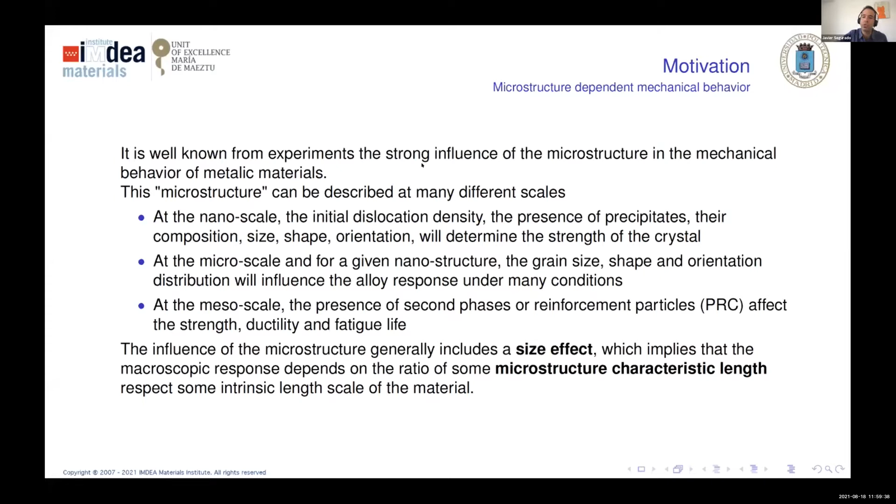In addition to the effect of the microstructure in terms of topology, there is a size effect. This means that even for the same topology of the microstructure, let's say grain size distribution or volume fraction of reinforcement particles, the actual size of the microstructure has an influence on the mechanical response. This is what we are interested in, and this is what I will present.

When does it happen? At the micro scale, this is something very common that we found, called the Hall-Petch effect. We have the same grain size distribution for the same heat treatment, same material—here an example is IN718—and just the variation of the average grain size produces different behaviors. In this case, the smaller the grain, the stronger the response.

At a larger length scale, when we have particles or inclusions embedded in a metal, for the same volume fraction of particles, we can have an effect from the actual size of the particle.

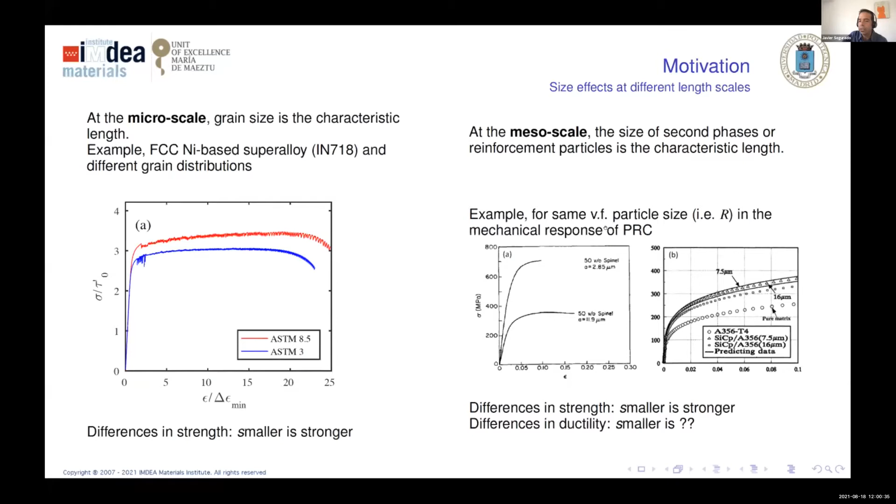So in this case, the smaller the reinforcement particle, the stronger the response. And this effect is also observed in ductility, which is also affected by the size of the particles.

We want to study that, and we want models that are able to link this microstructure, including size effect, with a macroscopic response, and computational homogenization is probably the best option. Computational homogenization aims at obtaining the macroscopic response and solving also the microfields, as shown by Dirk in the previous presentation, by solving the boundary value problem on an RVE of the microstructure.

In this case, the results depend on the microstructure and the behavior of the phases. That can be anything from elasticity to crystal plasticity or damage models.

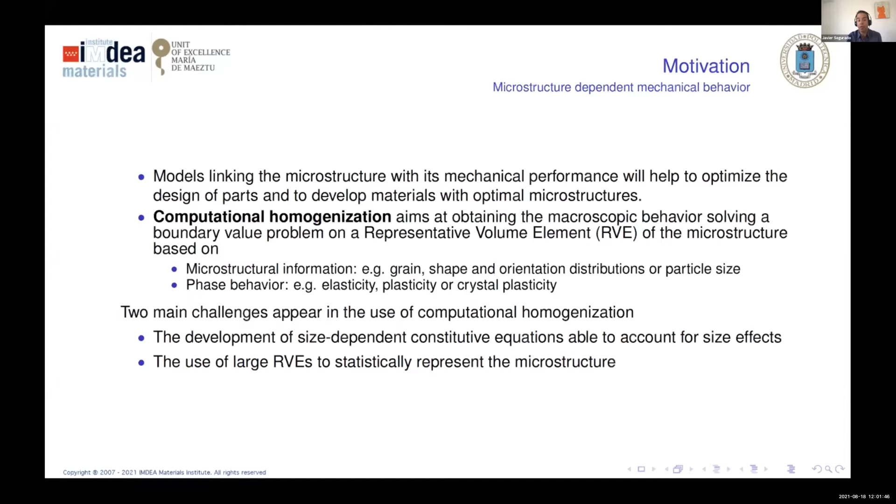In order to address these two aspects of size effects and computational homogenization, we have two main challenges. The first is that we have to develop or include size-dependent constitutive equations or approaches if we want to capture size effects, since standard crystal plasticity, standard plasticity, or some fracture approaches do not consider size-dependent behavior. The second is that if we want to take into account the effect of the microstructure accurately, we need to use large RVEs, very complex, that represent the microstructure accurately.

These challenges have of course been studied in the literature. For the first one, there are a lot of models that introduce size dependency. In the microscale, we have strain gradients in crystal plasticity, micromorphic models, and similar models. In the mesoscale, we have other similar approaches, but normally these models are very complex and are applied under simplistic approaches, so it's difficult to find these complex models applied in complex three-dimensional simulations.

Regarding the second challenge, using large RVEs, the problem is very much related. We have alternative approaches to FEM, like FFT, which is the basis of DAMASK, for example. But many times these models use standard models, although linked with other chemo- or temperature-dependent constitutive problems, the mechanical equations are very often local, so standard.

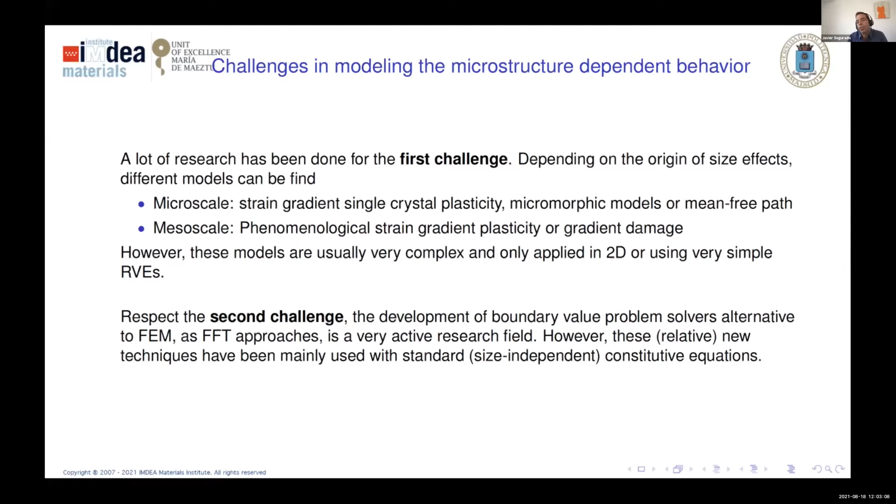The threat is just to link the two challenges, and this is precisely the objective of this review work. We want to develop microstructure-dependent models based on FFT homogenization that allow us to study and predict microstructure size effect. I want to emphasize what microstructure size effect means.

Gradient models appear when the community wanted to see why having a specimen of different size leads to a different response. Here the size effect is the relation between the specimen length, or some characteristic length of the specimen, with respect to some intrinsic length of the material.

In this case, we're speaking of another type of size effect: material size effect. Here the size effect comes from the relation between some characteristic length of the microstructure, not of the specimen - for example grain size, particle size, distance between particles, things like that - with some intrinsic length scale of the material.

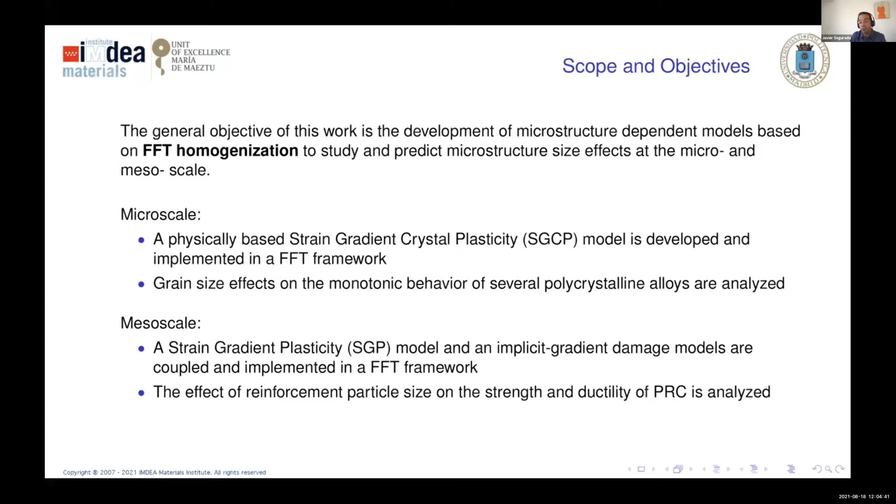In this case, we will present two works. One is on the microscale, where through a strain gradient crystal plasticity model we will study the grain size effect, and another is on the mesoscale, where combining strain gradient plasticity with an implicit gradient damage approach, we will study the effect of particle size in particle reinforced composites. Which is the common homogenization framework?

The common homogenization framework is FFT homogenization, and FFT homogenization is not new at all - it's almost 30 years old. It was introduced by the pioneering work of Moulinec and Suquet. What is the key idea?

I'm not going into many details, but the thing is, we have discrete fields, and we can operate with these fields in Fourier space. So we transform into Fourier space with a discrete Fourier transform, and then we can perform some operations very efficiently. The first one is that a field can be derived just as a multiplication - the Fourier transform of the derivative of a function is nothing but the product of the frequency by the transform of this function.

So by a product, we have the operation of derivative. And it's clear that using this and combining it in several dimensions, we can obtain expressions for different differential operators like divergence, gradient, curl, and so on.

And the second thing is the convolution. If we use Green's function, the solution of a problem can be obtained as a convolution of the Green's function with some source term, and this is the basis of the Fourier method. The problem is that in real space this is extremely expensive, an order n square operation, but this convolution can be performed very cheaply in Fourier space, because convolution there is just a product.

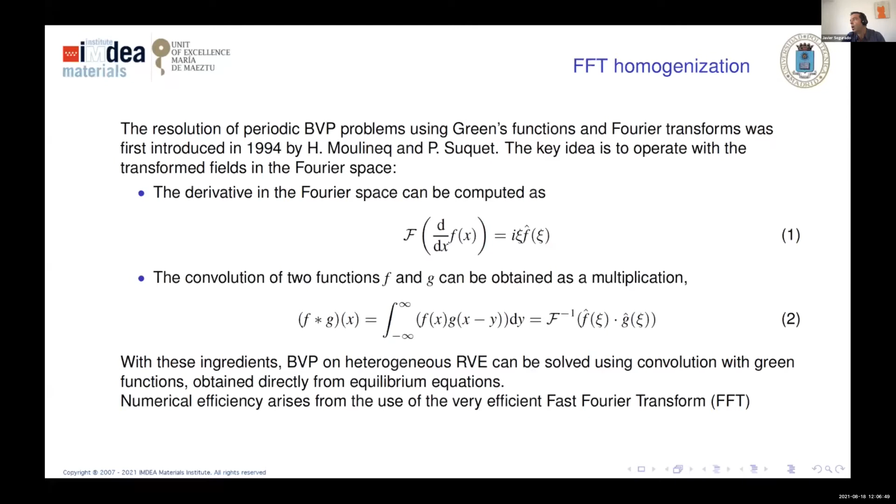So with these two ingredients, boundary value problems on heterogeneous RVE, can be solved very easily. The key is that this transformation from real to Fourier space can be done very efficiently. Operations in Fourier space are fast, and moving fields from real to Fourier space is also very fast because we make use of the FFT algorithm, which allows us to do the transformation in order n log n.

So what are the benefits? There are three main benefits of FFT solvers for computational homogenization, and I emphasize computational homogenization, not general boundary value problems, because things become much more difficult in that case. The first advantage of FFT versus FEM is periodicity, which is ideal for computational homogenization. This is natural in FFT, while in FEM it introduces additional complexity and computational cost.

The second thing is the computational cost itself. The most expensive operation in FFT is the Fourier transform, which is order n log n. In FEM, depending on whether we have a direct or iterative solver, and depending on the bandwidth, we are normally at order n square or n cube computational cost.

So it means that in the same time we can reach much larger RVEs or do more statistics. The third and very important thing, also shown in many examples by Dirk, is that we don't need to mesh. We can use directly information from tomography or from EBSDs and do a direct simulation.

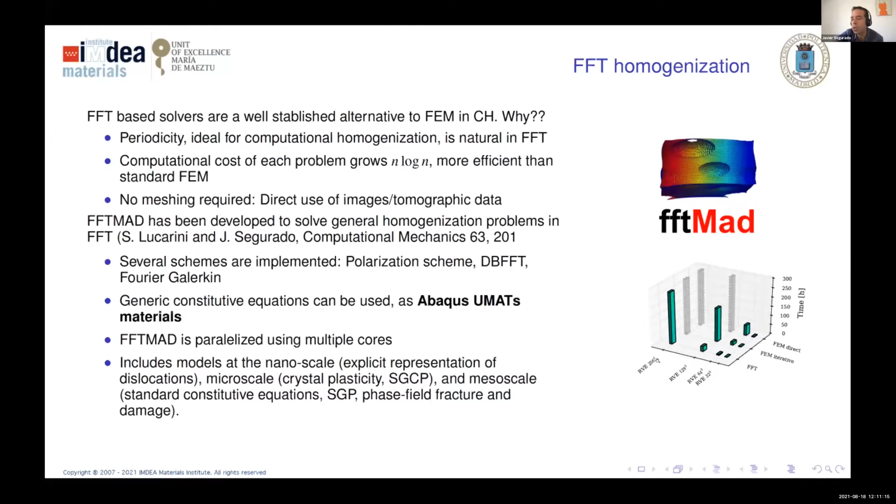But when we move to 16 million voxels, that is 256 cubed, then in FEM we cannot even allocate a problem for the same computer.

So what is the computational homogenization problem? The statement is we have an RVE, a real RVE that we have solved within FFT with thousands, something like 20,000 grains. And we want to solve the equilibrium, divergence of Piola-Kirchhoff stress equal to zero. We want to solve the equilibrated stress under some boundary condition.

Which are these boundary conditions? We impose the macroscopic deformation gradient history, and we impose combined or mixed boundary conditions. So in some directions we can only know, we can also know the average stress. In this case, what we want to solve is the mechanical problem of the equilibrium under some macroscopic stress strain, having the fields being periodic.

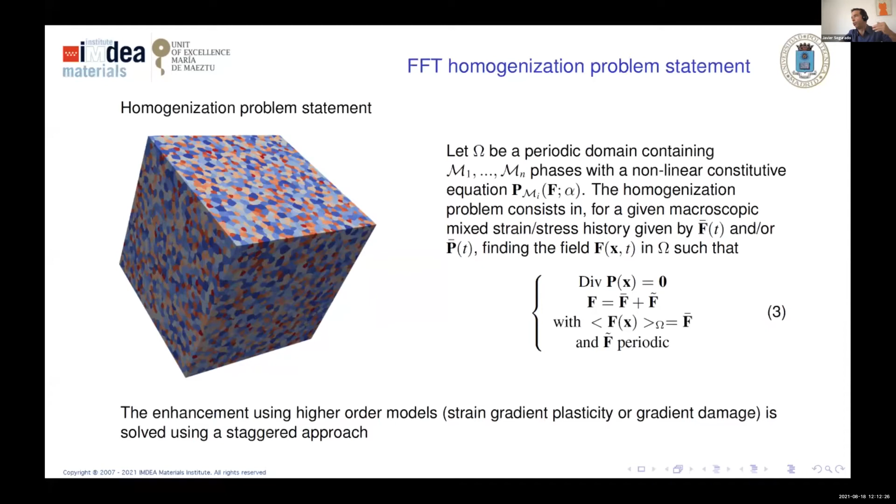And how we couple that with higher order models, we do it using a staggered approach. We solve this problem, and then we solve for the enhanced higher order problem for the coupled equations, and we do it until we get convergence.

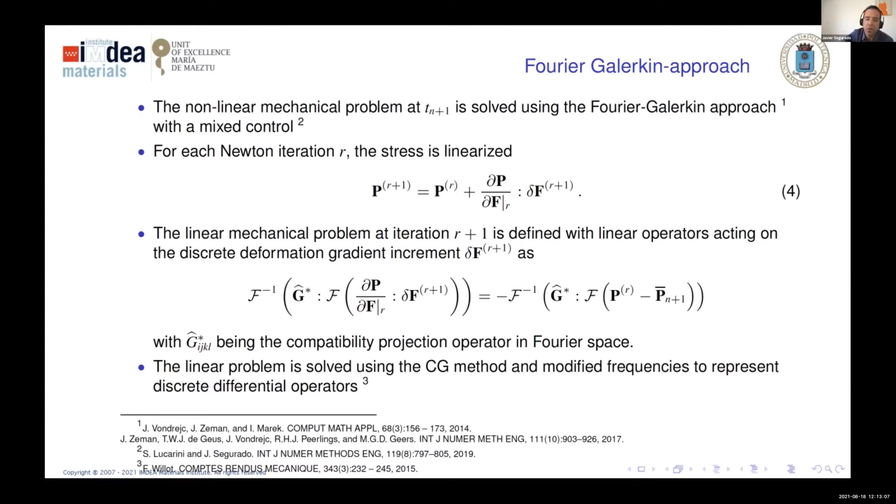In terms of the Fourier solver, we are now focusing many times on the Fourier-Galerkin approach developed by Jan Zeman, Geers, and co-workers and some others, that we have combined with our own method to impose mixed boundary conditions. So we do not have to iterate for obtaining uniaxial stress, but we can directly impose free stress or some given stress in some directions within the problem. I'm going to pass over this—it's not in the scope of the talk, but this is what we are using.

Let's go to the two problems that I want to show. The first one, as I told you, is on the microscale, and we're interested in using this technique to obtain grain size effects in polycrystals.

The grain size effect is a very old and well-known problem, and there is a well-known relation written here, the Hall-Petch relation, that tells us that the flow and the yield is related with the inverse of the square root of the grain diameter. This law scales well experimentally, not exactly, because this exponent is not exactly 0.5 and some other things, but it works more or less properly for many, many materials.

But we have an interest, first of all, in understanding which is the origin of Hall-Petch, knowing if it's universal or if it depends on other factors or microstructure items and so on. In this case, just combining strain gradient crystal plasticity with computational homogenization through FFT can help us to understand and answer some of these questions.

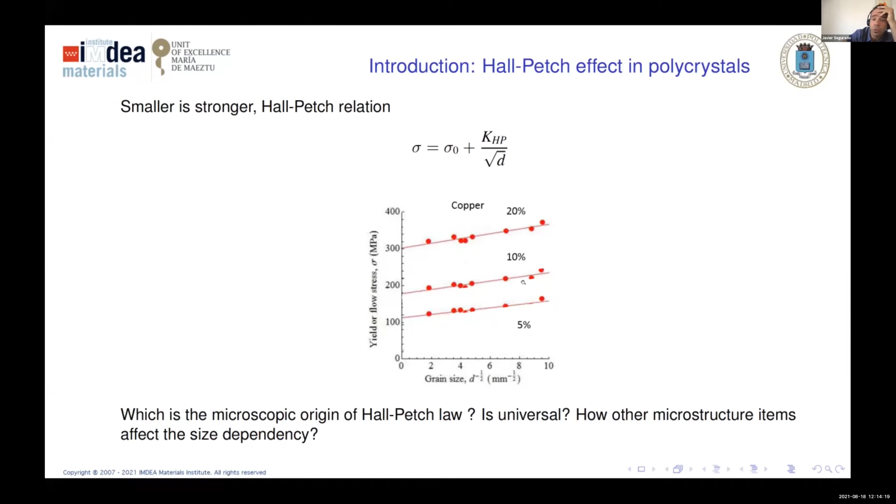First, which is the physical origin of grain size effect? It depends very much on the particular alloy, but one of the most common mechanisms that gives rise to size effects is the accumulation of geometrically necessary dislocations around grain boundaries. This geometrically necessary dislocation appears due to the plastic incompatibility and the accumulation of dislocation pileups near grain boundaries. Let's explain this: when I have a grain that wants to deform in one direction, and another grain in another direction, because crystal plasticity is very anisotropic...

what I have are some strains that are not homogeneous within the grain. These strains have a variation from the grain boundary to the interior. In order to accommodate this gradient of the plastic strain, we need to introduce into the material some dislocations of the same sign that somehow cover this incompatibility in the deformation. These are what we call GNDs, and they are responsible for that.

Of course, for the same change in plastic strain, the smaller the grain, the larger the gradient, and then the larger the amount of GNDs that we have to introduce. This is one of the sources of size effect, the one that we are considering here. But nevertheless, this size effect depends on many other factors: the anisotropy of the crystal, the particular texture, the initial dislocation density. So we cannot use any universal equation—Hall-Petch works well or poorly because we're fitting something very simple into a very complex problem.

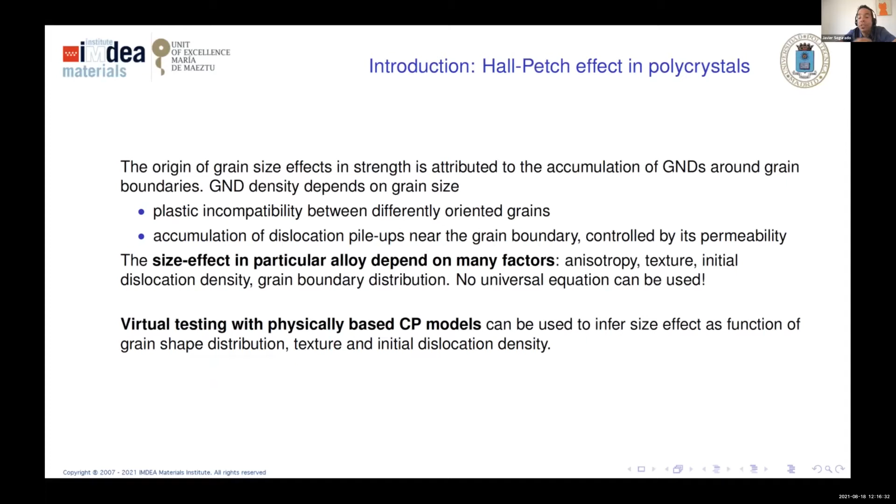Let's put the microstructure, as much information as we want, and let's make a virtual test, okay, just changing the average grain size and see which size effect we get. For this we need a crystal plasticity model.

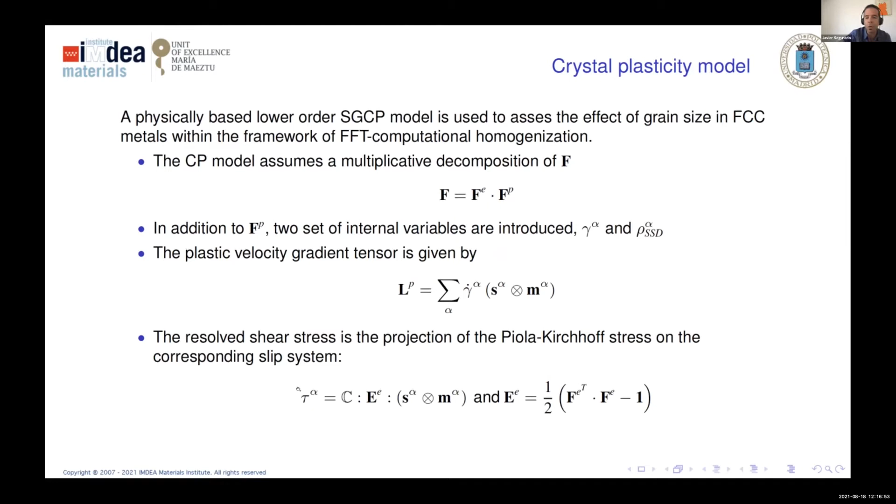I will go fast. The model has the standard kinematics of multiplicative decomposition. Plastic velocity gradient is the Schmid factor multiplied by some shear rates, and the driving force is the resolved shear stress tau, that is nothing but the projection of the stress through the Schmid tensor.

So the shear rate follows a phenomenological power law, where the driving force is the resolved shear stress, and we use a simple, because we want to limit very much the number of parameters, a very simple physically based model. The model is based on Kocks-Mecking.

So we have an internal variable that is the statistically stored dislocation density, which we put as rho, and the evolution of the dislocation density is driven by the Kocks-Mecking equation, which has a creation or accumulation term and an annihilation term. We have some parameters: the availability of the material to accumulate dislocations, modeled by K, and another that is the distance from annihilation.

This is the evolution of this internal variable, and then the critical resolved shear stress is directly given by the Taylor model, where we say that the critical resolved shear stress is nothing but the shear modulus, the Burgers vector, and the sum of the dislocation densities pre-multiplied by some factors that account for the different junctions, so the different type of latent hardening of some systems to the other.

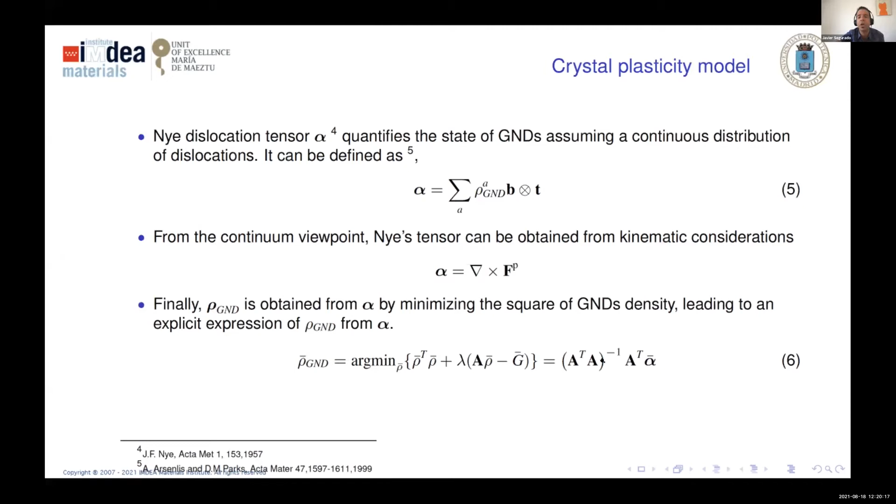So we do that, and how do we solve this? Because we are in FFT, we can very easily do the differentiation, the curl operation, in FFT, because we know the internal variables exactly at the same points where we know the other fields. So we just do the curl, and we take care that we don't have noise, because we have an Fp that has some strong discontinuities from grain to grain.

I'm not going into the details, but we apply that and show how we can obtain size effects. So we're going to use four alloys: copper, aluminum, nickel, and silver, and we're going to use this type of RVEs with 100, 200 grains and different discretizations. The model is not cheap, so we normally use 100, that is enough. We're going to create a synthetic RVE with an average grain size and standard deviation following a log-normal distribution, and we're going to use for this example just a random texture.

So now the model has some input parameters that are obtained from dislocation dynamics in the case of some dislocation interactions, or from experimental studies, but we have not fit any parameter. That's precisely the reason why we want to minimize the number of parameters of the model.

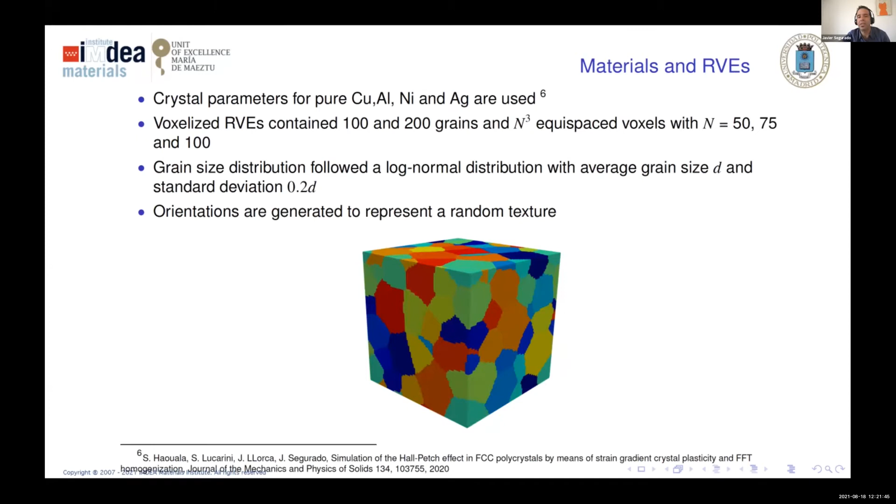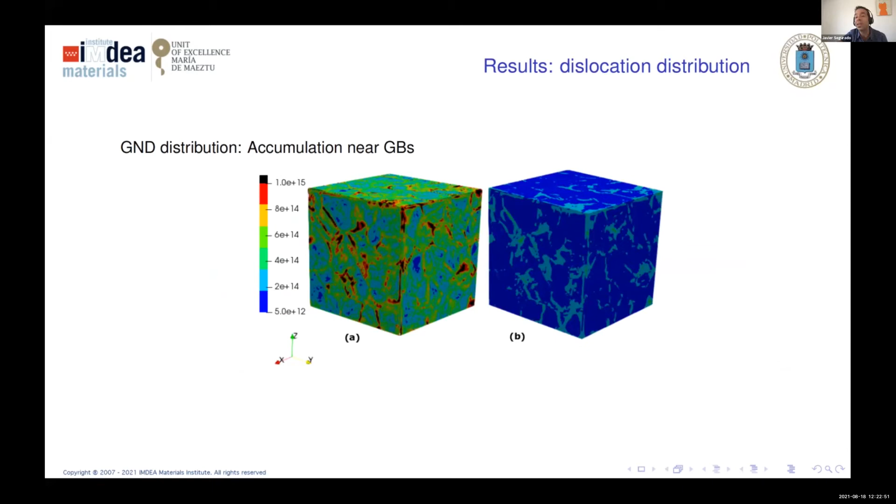Where do the GNDs go? They go to the grain boundaries, that's where we have the largest gradients, that's where they accumulate. And since they accumulate there, the dislocation density cannot grow more, but we have stronger points near grain boundaries.

This is due to the way we incorporate the gradients through the GNDs in the Taylor model. So we can say that this is something we want to improve.

But I want to emphasize, and that's why we're quite happy with this model, it's published in the JMPS in 2020, that the interesting thing is with a quite simplistic model we're able to reproduce experiments without fitting parameters for many FCC alloys with quite good accuracy, considering more or less the physics of the problem.

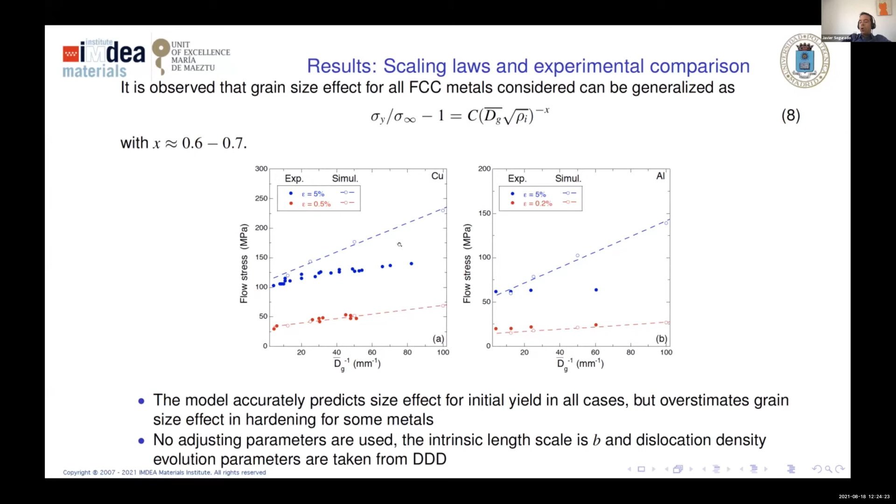Let's go then to the next problem, that is size effect at the mesoscale. And in this case we're going to focus on particle reinforced composites. If we don't have the effect of the grains and we consider that the material is like a monolithic material, isotropic or anisotropic, but what we observe in the microstructure are particles, we have a particle size effect.

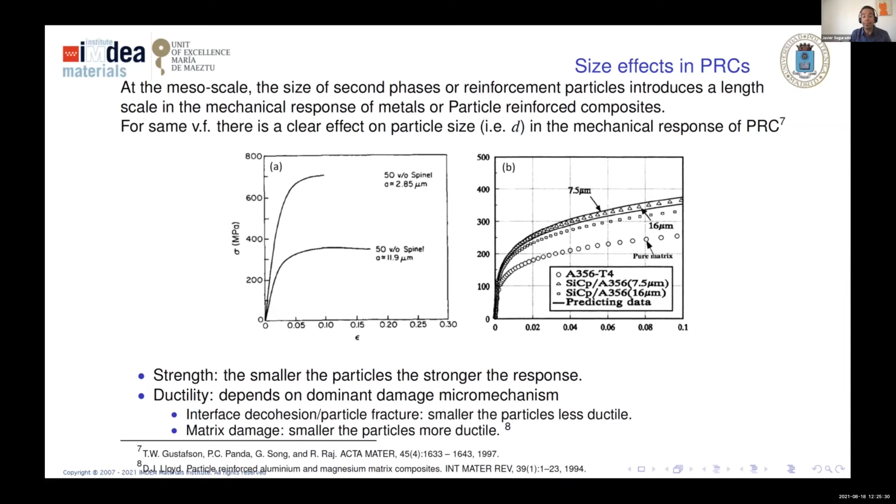But we also have an effect on ductility, and this effect is not so clear, but it depends on the dominant damage micromechanism. So if we have interface decohesion, the smaller particles produce a more brittle behavior, but if everything is ruled by matrix damage, that's what we're going to study, and this might happen at high temperature, then the smaller the particles, the more ductile the material.

And what's the physics behind this, and what models do we have if we want to account for this? In the case of ductility, we have to think in terms of the intrinsic length scale. And this intrinsic length scale, that in the case of the smaller length scale was the Burger's vector, in this case is the size of the damage band.

So in ductile failure we observe a band of damage, so we don't have a localized crack, we have like a damage band that introduces an intrinsic characteristic length. And then the ratio between the characteristic band of damage and the size of the particles is the one that drives the size effect in terms of fracture.

And in the case of strength, let's say the reason is more or less the same as before. There is some characteristic intrinsic length scale that is equivalent to the Burger's vector, but it depends on the model you take, it's the intrinsic characteristic length of the plasticity. And then the size of the particle relative to the characteristic length introduces the size effect. So in this second case, when the particle size is much larger than the characteristic length for the plasticity, these effects are negligible. So what is the objective?

We want to develop an FFT framework to study particle size effect in particle reinforced composite, including ductility and strength. This work has been published in Computer Methods and Applied Mechanics in terms of the model, and the one on size effect is now under review.

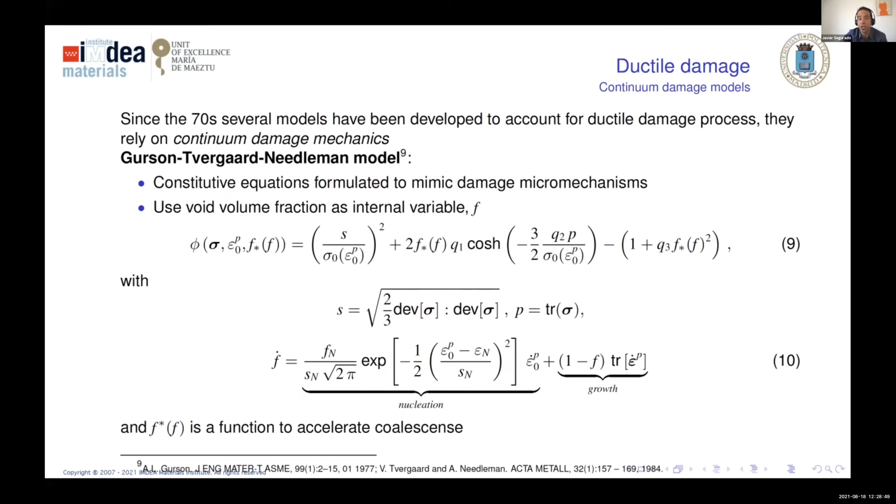The problem with these continuum damage mechanics models, well known for many years, is that when we implement and try to solve them, at the point where we reach the maximum, we reach a condition of instability.

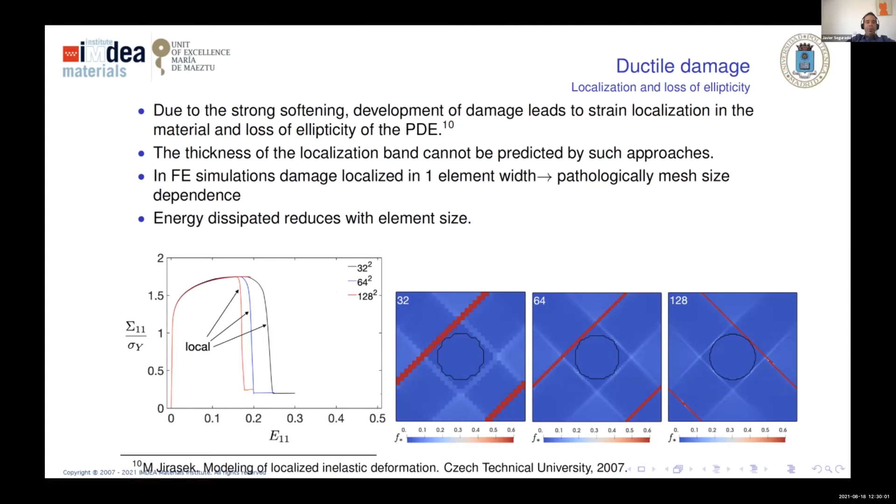How can we solve it? There are different approaches, but we focus on using non-local models. The idea is that some internal variable, which can be the volume fraction of porosity or another variable, does not depend on its own value alone, so it's not local, but depends on surrounding points.

We can say that this internal variable, imagine the porosity, the non-local version is just the integral of some weighting function times the value of the local counterpart in a region controlled by a characteristic length. This integral non-local model is very hard to integrate in a standard continuum mechanics framework. So what we can do is a Taylor expansion of the expression, playing around with the equation, converting it into a gradient approach.

In this case, the unknown is the non-local internal variable, obtained by solving a partial differential equation, the Helmholtz equation. It's nothing but the same equation we solve in phase field, with a characteristic length like in phase field, and some boundary conditions that are free Neumann boundary conditions.

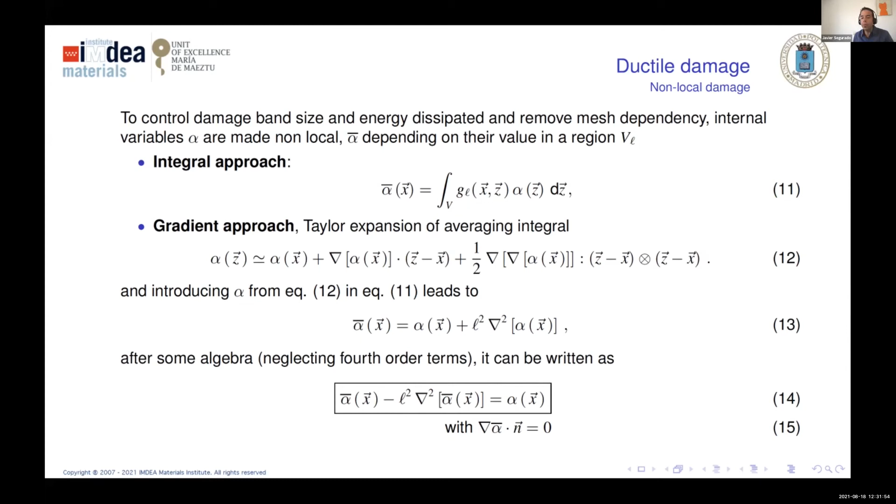The difference here is that the source term is the local value of the internal variable. The other difference is that the characteristic length here is a physical parameter, not a numerical parameter. This physical parameter is related to the size of the band in which we localize damage. So unlike phase field fracture, where in linear elastic fracture mechanics the correct solution tends L to 0, here L is a parameter we have to consider because it's part of the physics.

So in this case we have to solve a coupled system of PDEs: the equilibrium equation, in which sigma depends non-linearly on the non-local variable, and the Helmholtz equation that delocalizes the value of the internal variable. Which internal variables do we delocalize in Gurson? Instead of delocalizing the volume fraction of porosity, we delocalize the volumetric plastic strain and the equivalent plastic strain.

So in this case, the evolution of porosity depends on the non-local counterparts of these internal variables. So we have to solve a Helmholtz equation for each of them.

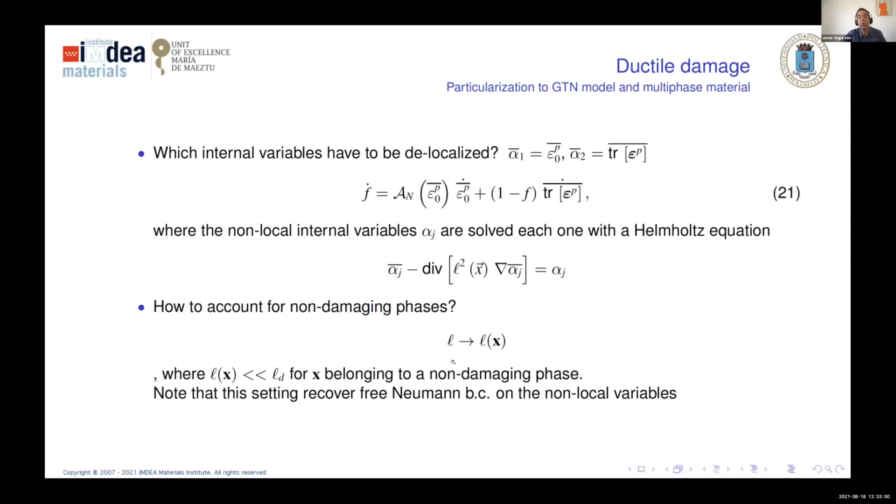The second question is how we account for materials with non-damaging phases. In this case, we can introduce a characteristic length that depends on the position, making the characteristic length for points belonging to non-damaging phases tend to zero. If we do that, we have proof that we recover the free Neumann boundary condition, as we will see in the experiment.

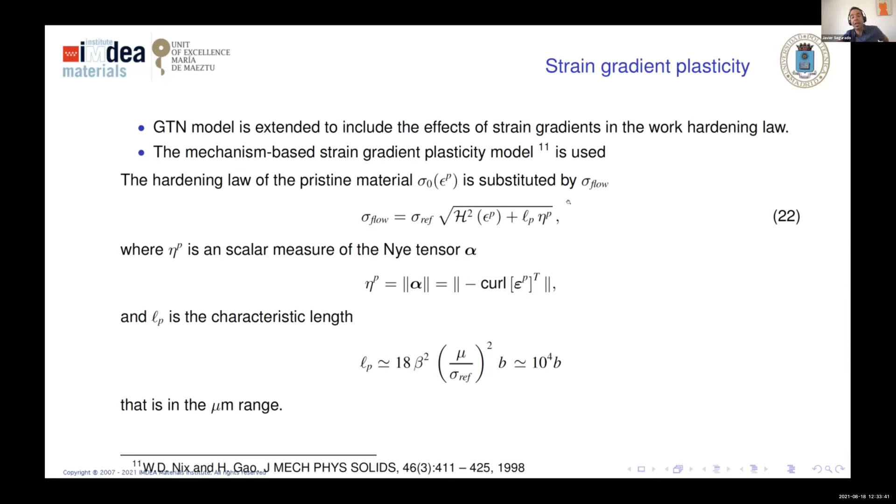So we have the first part, the gradient model and the damage model, and the other is strain gradient plasticity. What we're using is the mechanism-based strain gradient plasticity model, exactly the same as the crystal plasticity counterpart, based on the Nye tensor through the curl of epsilon p, introducing an expression that emulates Taylor's. Let's say that is the upscaling of the previous constitutive model.

So we're now going to see how it works on particle reinforced composites, first in 2D. Let's first check if we are able to solve the pathological localization problem.

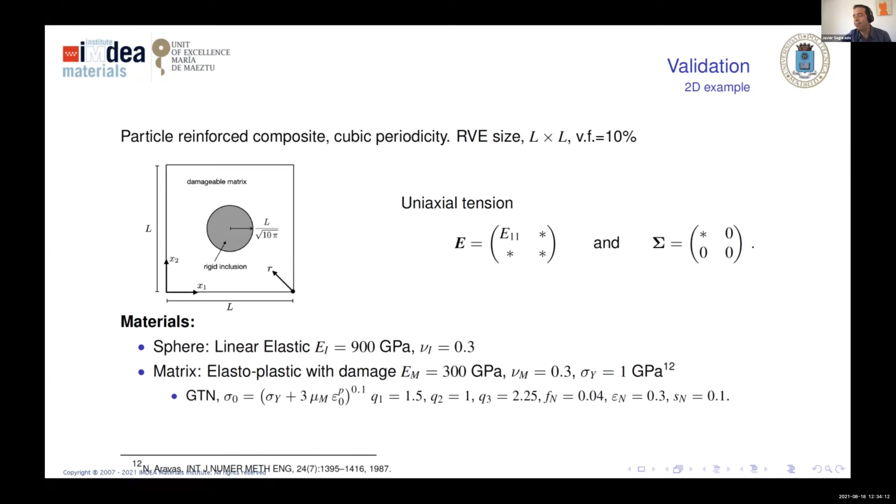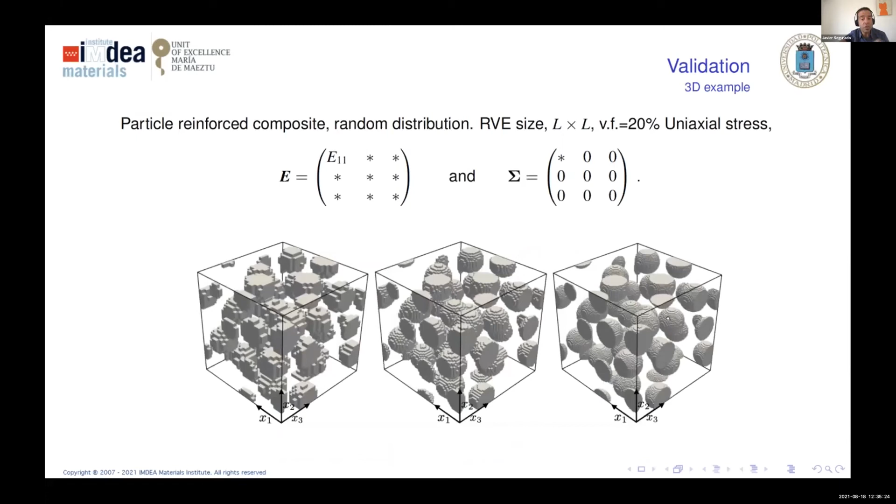Okay, let's go to 3D. Three different sizes. Now the RVE is a particle reinforced composite with spherical particles randomly located, 20% volume fraction, and the same setup. The original model, local, has a size dependency, while the non-local model has the same behavior for all the different discretizations.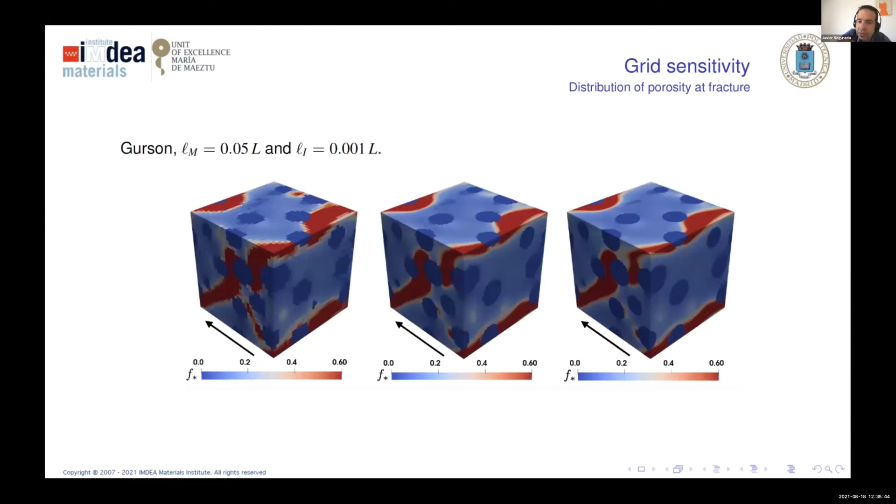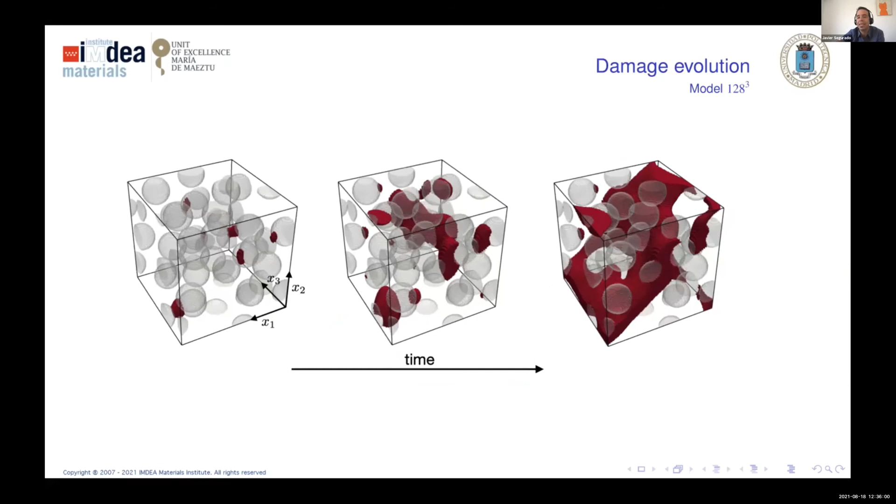And we are able to model which is the band, how it locates, and we are able also to show how the band evolves. So we have developed a very nice model that allows us to do 3D simulation of fracture or damage in this case, considering complex microstructure.

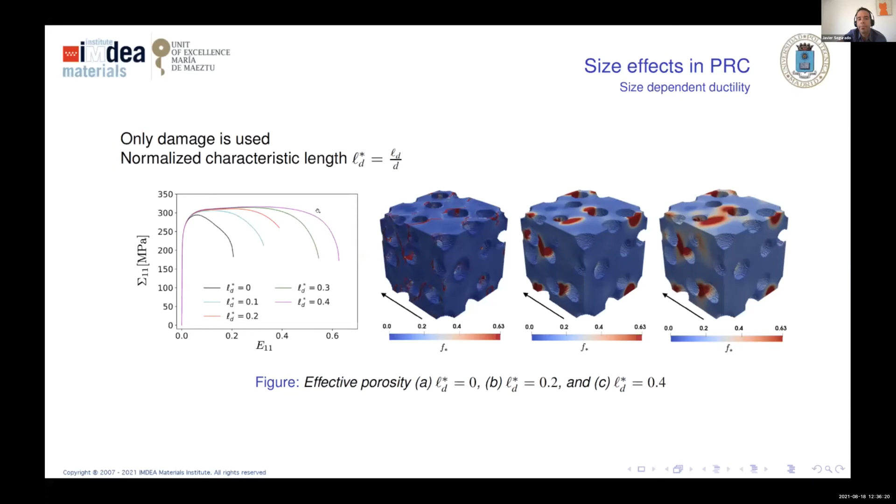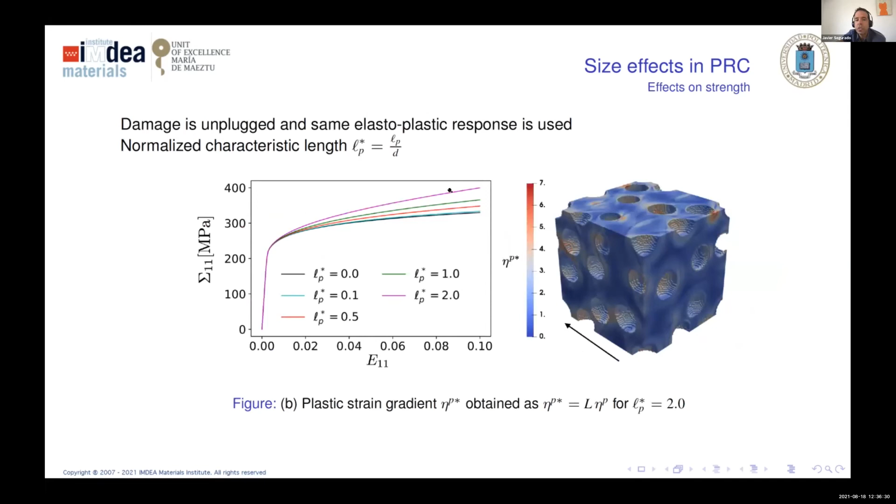I have no time almost to finish, just showing that if we combine strain gradient plasticity with damage, we can observe the size effect. The first one in damage is that the smaller the particle, the more ductile - we see that the curves move to the right. And in the case of the strength, the smaller is the stronger. If we combine both, we can see which are the optimal particle sizes for particle reinforced composites.

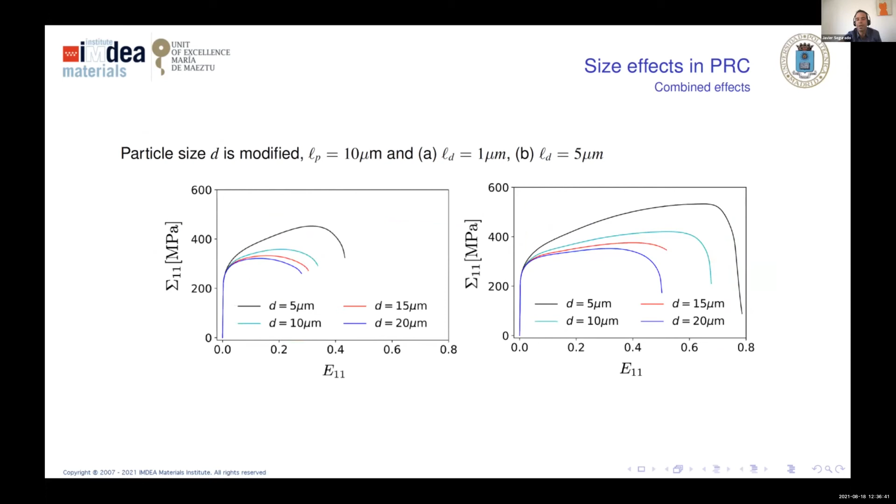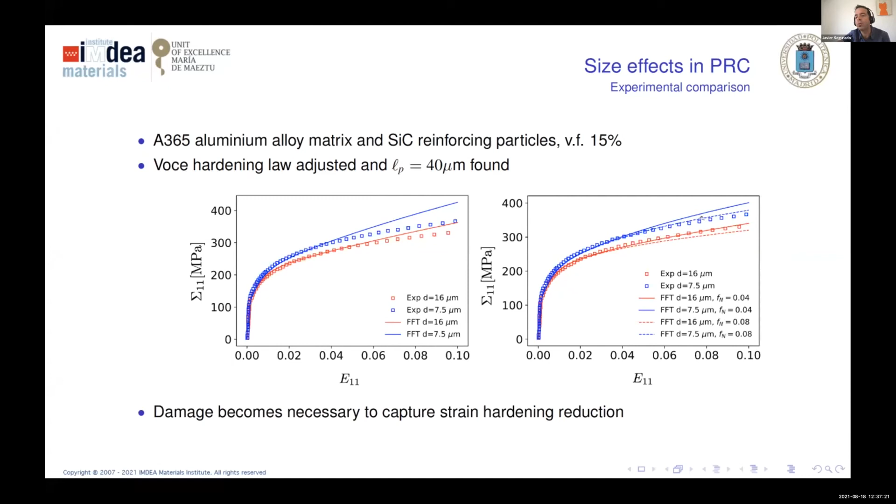So how this fits with experiments - in this case we have a quite phenomenological model, so we have to fit parameters. What we observe is that if we fit just plasticity without damage, we are not able to predict the response for large strains, but we predict well the particle size effect. And with this model fit up to here, if we just include the damaging part, we are then able to measure the first part where damage is not playing any role, where we have particle size effect, and the second part where the size effect in particle and damage play a fundamental role.

Okay, so, well, that's what we have done. Let's say that the main conclusion is that FFT homogenization is a very interesting tool to be combined with any type of non-local approaches through staggered models. I have not shown which are the techniques behind, but it's a good way to predict the effect of microstructure in the mechanical response, including size effects, both in monotonic response and beyond.

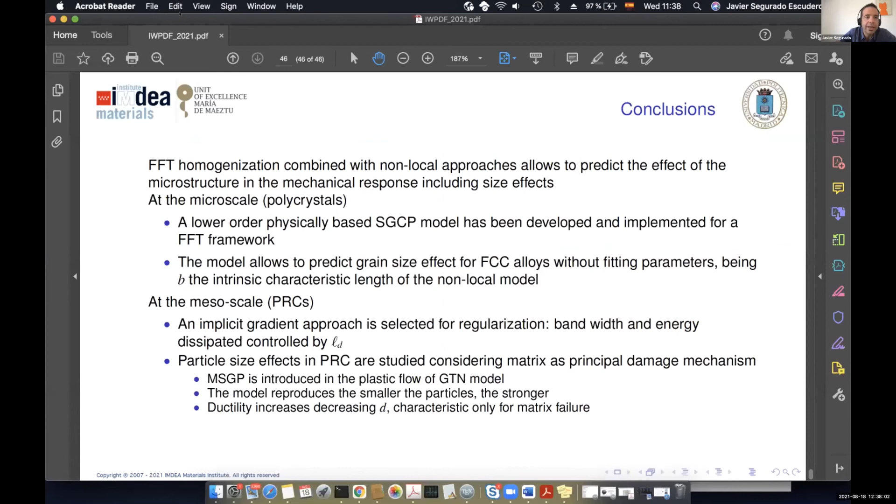Yeah, thank you very much, Javier. So the talk is open for discussion. Do you have any questions? Yeah, we have two questions. So Lei Louis, yeah.

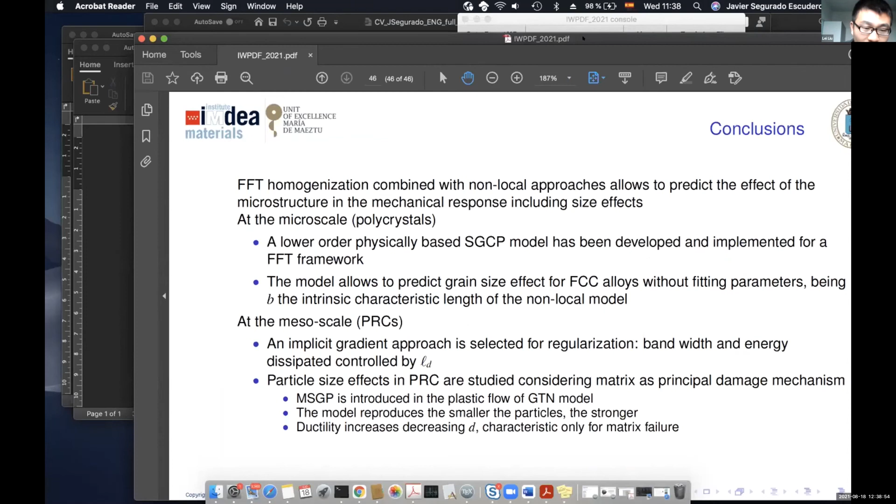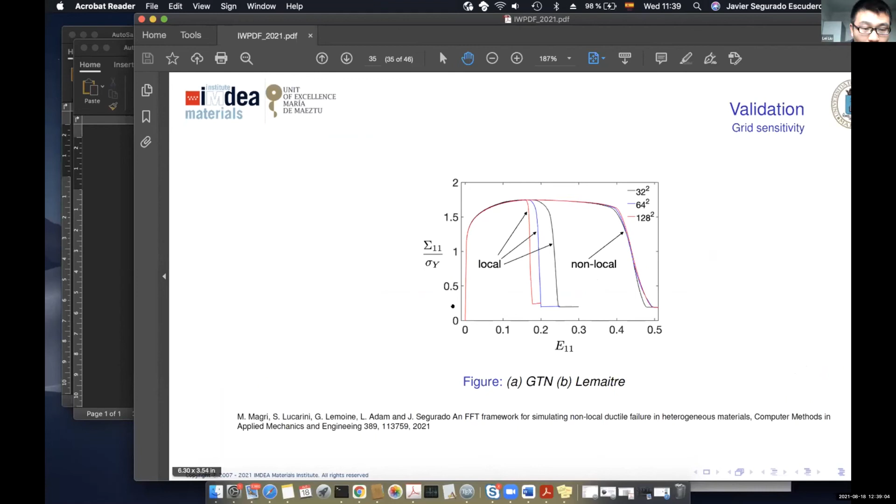I have a short question about your trick for how to account for the non-damaging phase. Can you go back to that slide? I don't know if I'm sharing right now. Yeah, you're sharing. Okay, which slide do you want me to go back to? The slide where you show your trick for the non-damaging phase. Okay, good. It's before, let me find it.

Yeah, this one. So I'm thinking about the equation where the length scale L is far smaller than the damaging length scale. So why not the other way around? For example, I would think if you make the length scale L much larger than the damaging length scale, what happens?

Well, I don't have it here, but it's proved using a volume over two phases, making the integral and imposing the continuity of the fields. You end up with a relation at the interface between the two phases. This relation tells you that if you want a free Neumann condition, so that the damaging phase has an evolution of the internal variable whose gradient multiplied by the normal equals zero, this can be done if on the other side you have a characteristic length that is much smaller.

So I'm not putting here any detail, but this is formally proved. From a qualitative viewpoint, you can imagine it like this: imagine you have an elastic phase, and you use the same characteristic length for the whole RVE. Then, although the internal variable is not defined in the elastic phase, when you average through the Helmholtz equation, it will diffuse inside, because the length of diffusion is controlled by L. If you set the characteristic length in the non-damaging phase to tend to zero, it will not diffuse inside. That's the thing.

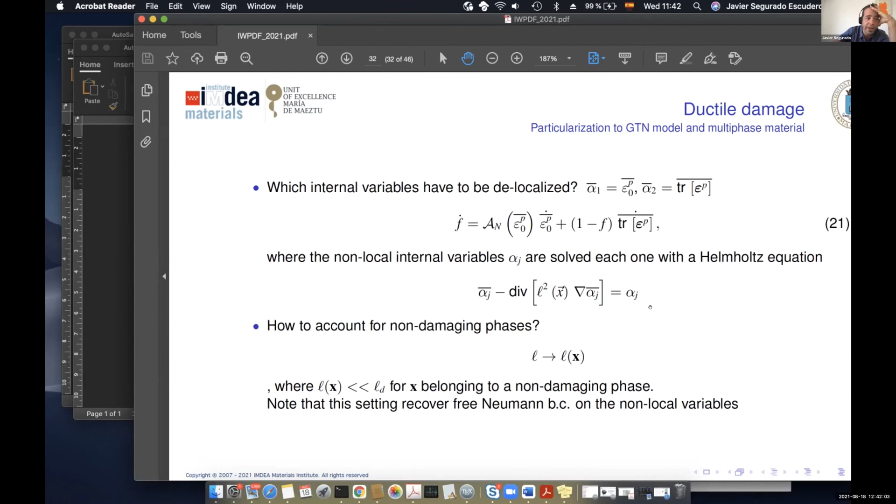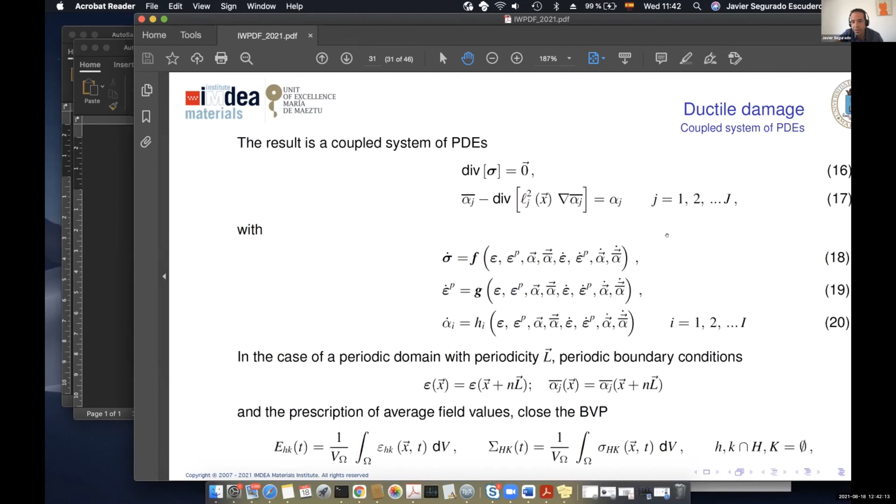Well, yeah, this is a very interesting and hard question. When you go to the mesoscale and to phenomenological models, the characteristic lengths are not well defined. If you follow the mechanism-based strain gradient crystal plasticity, you get a measure of the characteristic length that is somehow based on dislocation measures and scales with the Burgers vector. It's the least phenomenological of the mesoscale models to account for that, but at the end it just gives an order of magnitude, it doesn't even give an actual number.

So in the case of characteristic length in plasticity, from my viewpoint, it is not easy to obtain it from very clear principles, but normally you have to fit it with some macroscopic experiments.

This is one thing, and the other is the damage characteristic length, the size of the band. This is even worse, because it has been shown that this characteristic length is not even material dependent — you can find different band thickness for the same material under different loading conditions and different triaxialities. So it's convenient to introduce this characteristic length, but it's not like the yield stress or other parameters that are well defined and related to a material. They are, let's say, controversial parameters that from an engineering viewpoint can only be obtained by standard physical principles as an order of magnitude, and to be accurate, you somehow have to run tests and obtain them for the particular condition you want to study.

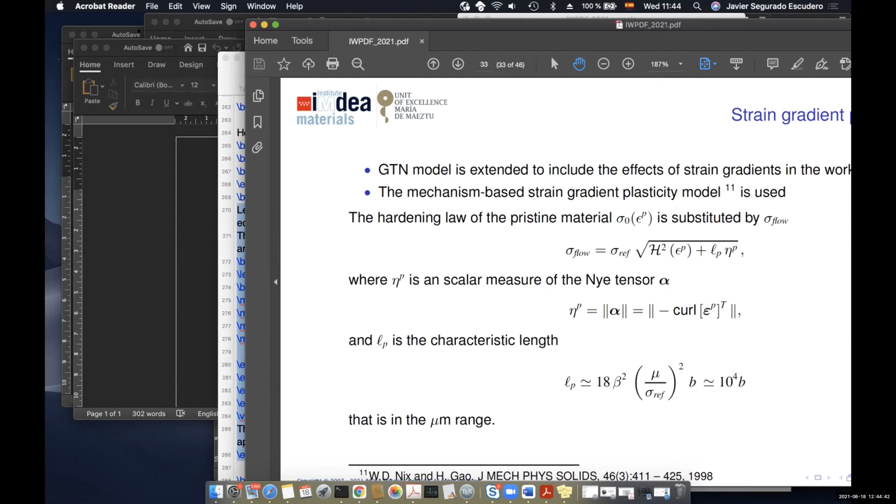Yeah, please. Thank you for a very interesting talk. I have one short question.

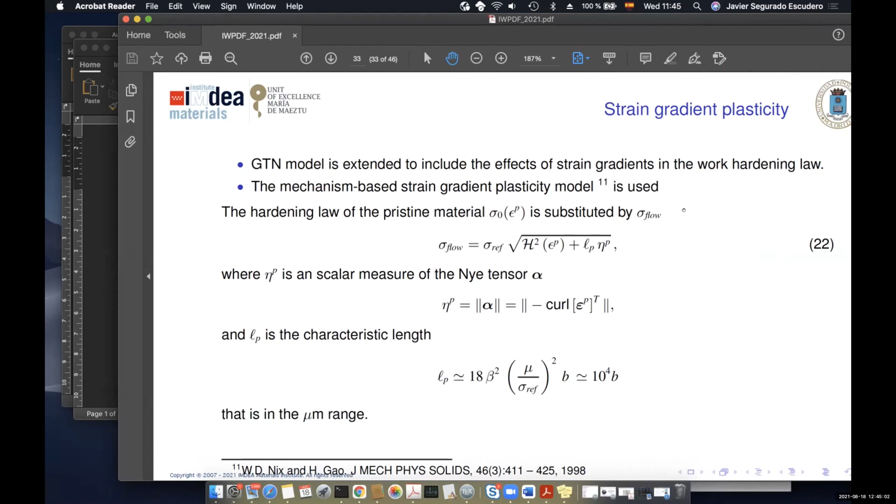You showed that decreasing the particle size, you can very clearly see the size effect with increasing ductility and increasing strength. But the question is, do you think that if you increase your volume fraction of particles, you may have a change in the damage mechanics, because currently you're only looking at damage in the matrix, and not on delamination or fracture of the particles. So if you increase your volume fraction of particles, you may have a change in the damage mechanics and obtain different results. Is that true?

Yeah, that's absolutely true, it's a good comment. I told at the beginning that the size effect in strength was clear: smaller is stronger, but in ductility, it totally depends on the damaging mechanism. In the case of particle fracture or decohesion, normally the size effect is just the contrary, as has been observed experimentally—smaller particles break earlier or have decohesion earlier. So if we introduce that into the model, that's something we're going to do in the near future.

Because we can have delamination using phase field fracture localized on the boundary. That's something the group of Dirk has also worked on. You can put all the mechanisms into the same model. In this case, as you suggest, volume fraction will play a role, because for small volume fractions, you can change from one mechanism to other. Small volume fraction might lead probably to just damage on the matrix, and you will get what I have shown. But for larger volume fractions, you promote particle fracture, and then you will get the other effect in ductility. That's absolutely right.

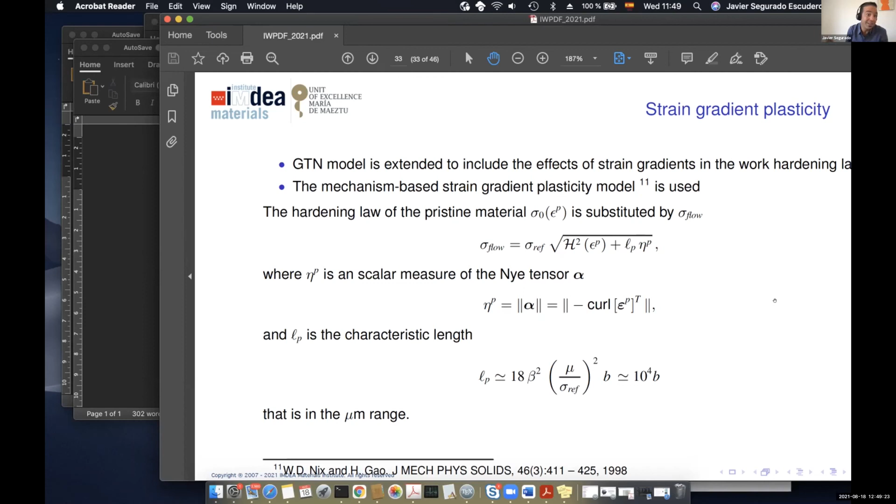That's something very important, because if you have a periodic boundary condition, you should combine it with periodic geometry—in this case, you fully get rid of surface effects, okay? Yeah, and that's precisely the objective. Okay, thank you very much.